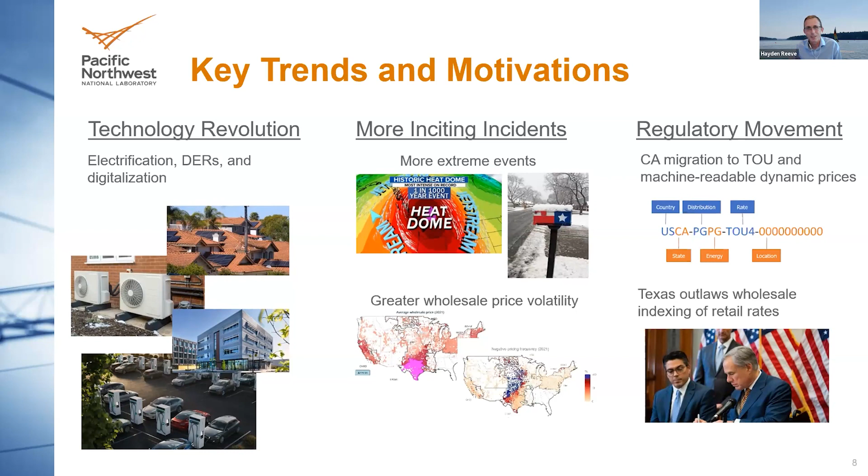So if we go to the next slide, PNNL has been doing a lot of work, both demonstrating in the field and with partners, the ability to provide these grid services from end users in the field. But we've also been doing a lot of work studying and analyzing future systems.

And so one big study that we completed last year was basically modeling the entire ERCOT system to show what large-scale demand-side participation means and how you might do that. And so we had a large integrated system model. We looked at different coordination frameworks. But the thing I want to really emphasize and showcase today is looking at the valuation methodology.

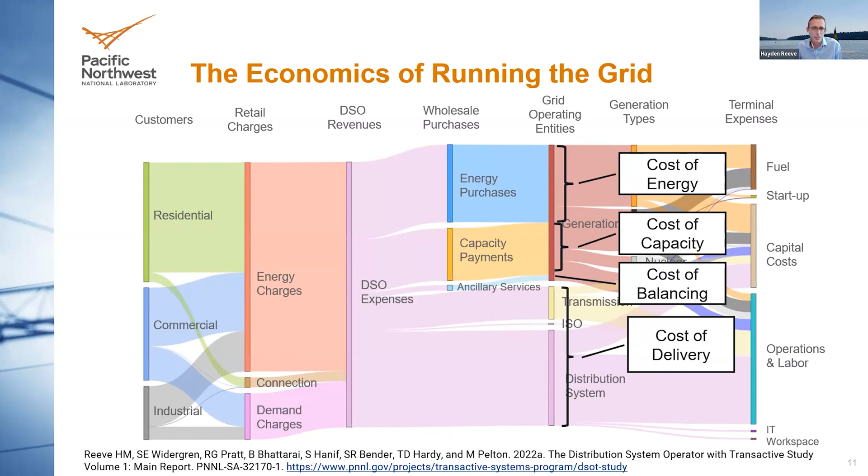So if you advance one more, I think this is useful to understand the proportionality of different functions of operating the grid and different grid services. So in terms of the grid services I was talking about, energy services is maybe about 30% of running the grid. Reserve or capacity, which you could combine with energy services, is more. The frequency response regulation ancillary services is only a small fraction, and a lot of the grid cost is just essentially what I call shipping and handling.

So if we go to the last slide, just some concluding remarks here. As we've found, and as many people know, there are just large fixed costs to operating the grid. And I think we'll see these grow, and we'll continue to see higher volatility in wholesale energy prices, and a desire to pass those on in terms of dynamic retail prices or time of use prices.

The second thing is there are now many, many proof points, both in studies and in real life, of the very large value proposition of grid edge participation. But the realization of that value proposition and the access to that varies considerably regionally. So some regions have become very motivated to enable this, others not so much.

And then finally, I think we'll see differences among these grid services in terms of which ones might be monetized and accessible to grid edge participants, things like energy capacity reserve services. But some just may not be big enough in size in terms of frequency regulation, and some might be too complex and too hard to incentivize for grid edge participants as we go forward.

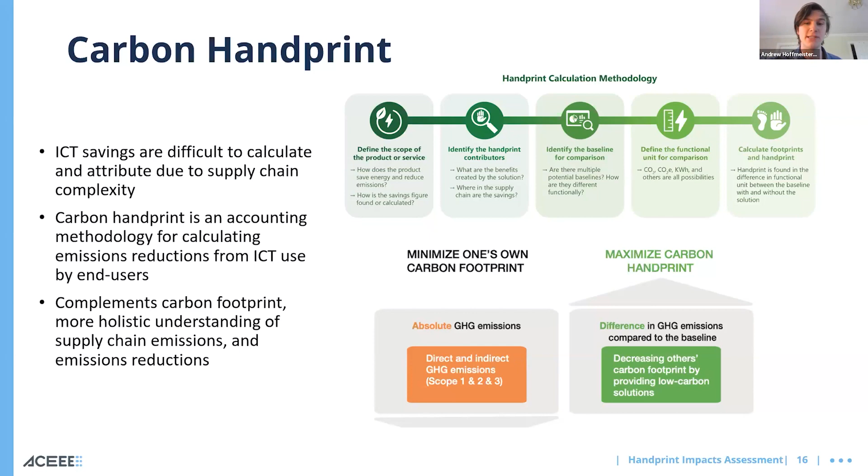So in these two graphics, there's a handprint calculation methodology, which we look to standardize in terms of the steps for finding a handprint: defining the scope, identifying the contributors, identifying a baseline for comparison, defining a functional unit, and finally calculating the footprint baseline, the footprint of a solution, and the handprint, which is the difference between them. So the goal in the effort of decarbonization is to minimize one's own carbon footprint while maximizing a beneficial carbon handprint. Next slide, please, Archie.

So ACEEE has been working for several years now with key technology partners like Cisco, Dell, and Intel to build out a proof of concept of what exactly handprint is and to evaluate the potential in calculating downstream emissions reduction impacts of ICT. Specifically, we've looked at these three case studies that I have here: the optimization of utility substations through a grid management solution, the optimization of depot charging of electric vehicles used for short-haul freight, drayage, and fleets,

and smart thermostats. So obviously, I can't spend too much time on the details here, but I'll cover very broadly the applications of each of our case studies and what the handprint analysis uniquely captures in this context. So we built out replicable calculators for finding the handprints, and we included optimizable inputs for various specifications. Firstly, I have smart thermostats here, which save energy broadly by using machine learning and data storage to adjust temperature settings based on patterns and preferences.

And we compared the emissions of a home or homes using smart thermostats to the life cycle emissions of a home using traditional thermostats across multiple scenarios of adoption. And the handprint that we ended up analyzing was the difference in emissions between the solution and traditional thermostats, which is otherwise lost if only evaluating the carbon footprint of the smart thermostat. So what we found was in 6 million Texas homes, which we analyzed specifically, they saved between 0.52 and 1.35 million metric tons of carbon dioxide, projected out to 2028.

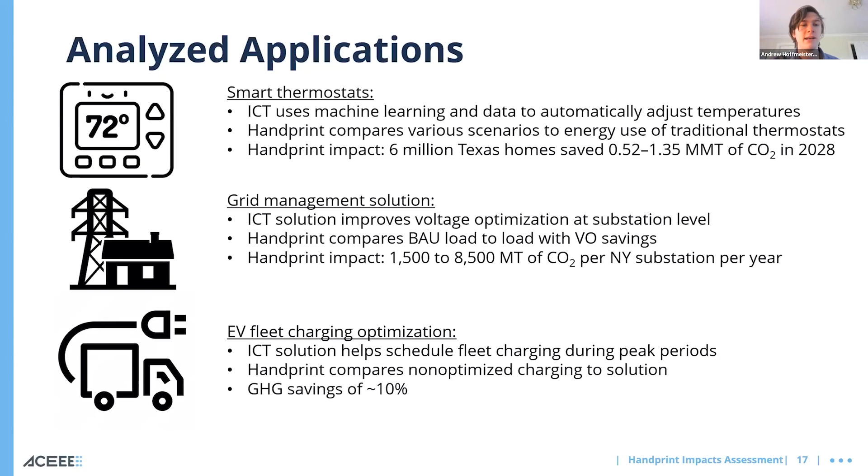Next slide, please, Archie. So now that we've demonstrated that handprint can be estimated in specific applications, we think that companies can now use similar approaches to begin to evaluate and report the full impacts of their products. The next step is to continue applying the handprint calculation methodology and tailoring it to other specific use cases. And what we determined is that there needs to be a standardized pathway towards attribution of emissions impacts in complex supply chains, especially in order to motivate companies to continue producing emission-saving technologies.

And handprint is just one of those methodologies that we wanted to demonstrate that we believe in. Handprint gets us on our way as a streamlined approach, uniform in its steps that I showed earlier, to revealing the impacts of a technology solution compared to its alternative, the business as usual.

Next slide, please. So thank you very much for listening. I think the applications of the handprint methodology will grow as technologies scale and complexity increases. I think this is a critical topic area to make sure that we can engage with scope 3 and supply chain emissions and emission saving in a holistic way.

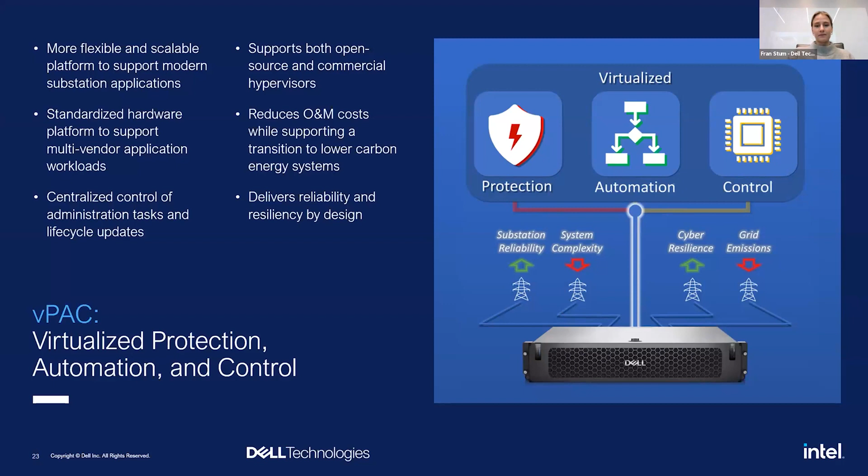So as Andrew introduced, we worked with ACEEE on completing one of these carbon handprint assessments specifically for our grid modernization solution. Most organizations are engaged in minimizing the negative environmental impacts, their carbon footprint, which we're most familiar with, of their activities through the efficient use of resources and lowered emissions. But to quote the U.S. National Climate Advisor, Ali Zaidi, we need the receipts when referring to how we measure and manage emissions data. So the way that we're doing this now, in this methodology that we discussed earlier, is the handprint assessment.

So working with our partners, Intel and VMware, Dell Technologies is taking the next step to reduce the carbon footprint of their customers by developing products and services that create positive effects, a handprint, if you will. So we're currently working towards measuring our exact carbon handprint in collaboration with ACEEE. And as our mutual end customers increasingly focus on sustainability, our ability to collaborate with other vendors and our partners to understand and optimize and attribute these carbon handprints and footprints to our solutions uniquely differentiates us from our competitors. Next slide.

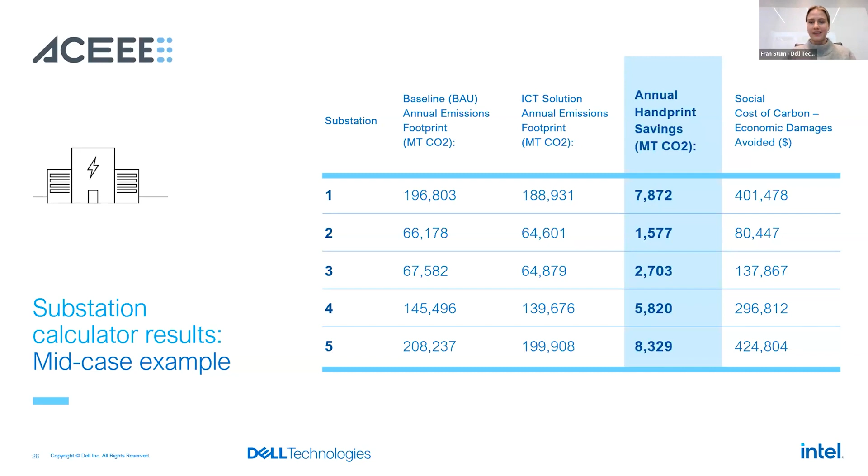When we're talking about the benefits of ICT enabled solutions like grid modernization. And with that, I'll be happy to answer any questions after the presentations, but thank you so much for having me.

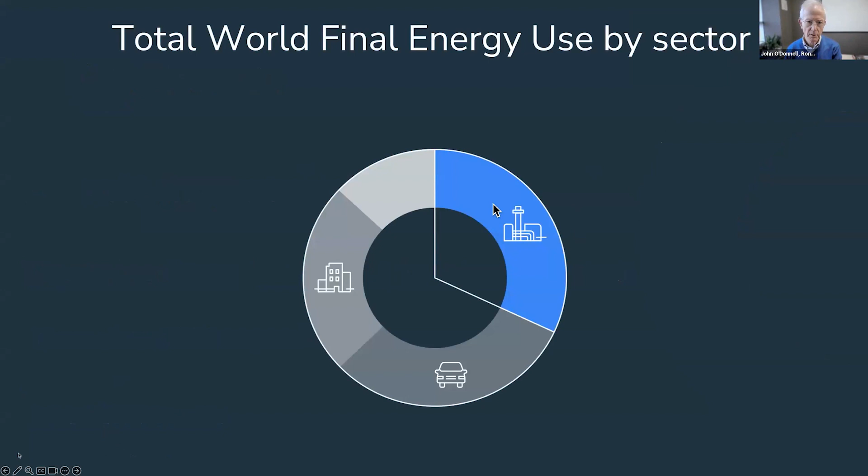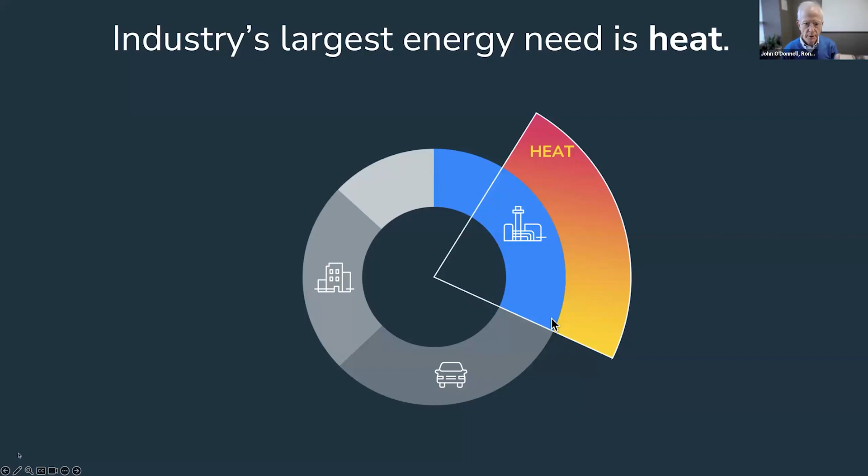I want to talk about something that people have thought is adjacent to the grid, but it is the next big challenge for the grid. Of total world final energy use, industry is the largest single portion, and 3/4 of the energy used by industry, 3/4 of all the coal, oil, and natural gas burned in the world, is for industrial heat. It's 6 gigatons plus, and hundreds of millions of tons in the United States.

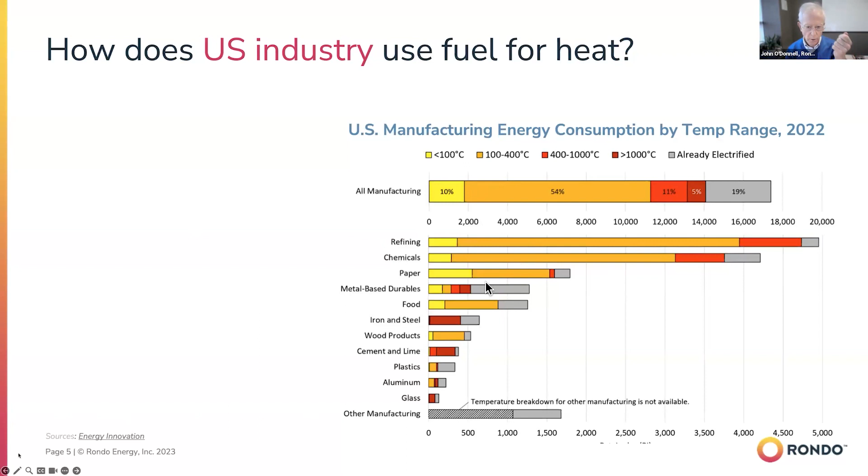In the United States, fuel is burned - this is an assessment by Energy Innovation looking at where industry burns fuel. People think of industry as cement and steel. Well, it is, but it's also food and paper and chemicals and fuels. And is this hard to decarbonize?

The challenge is that we are producing all kinds of low-cost commodities where energy is a really important part of the cost of production. It's going to go as slow as possible if a new solution is more expensive than fuel. There are other technical requirements - energy has to be continuous and has to be high temperature.

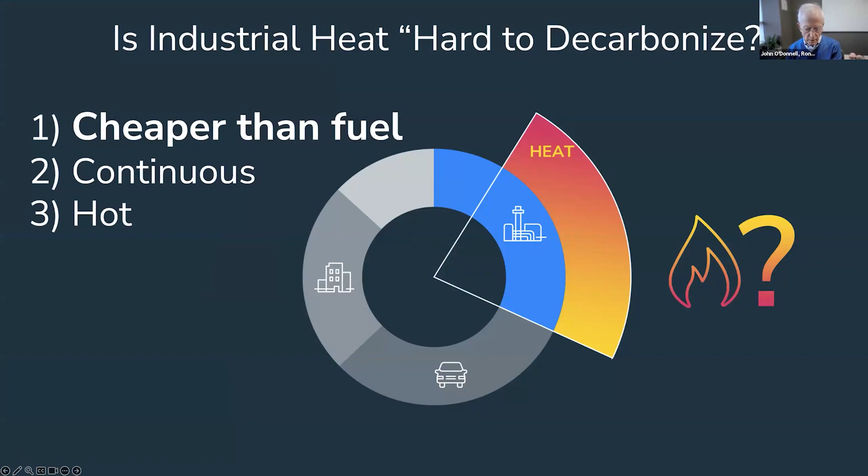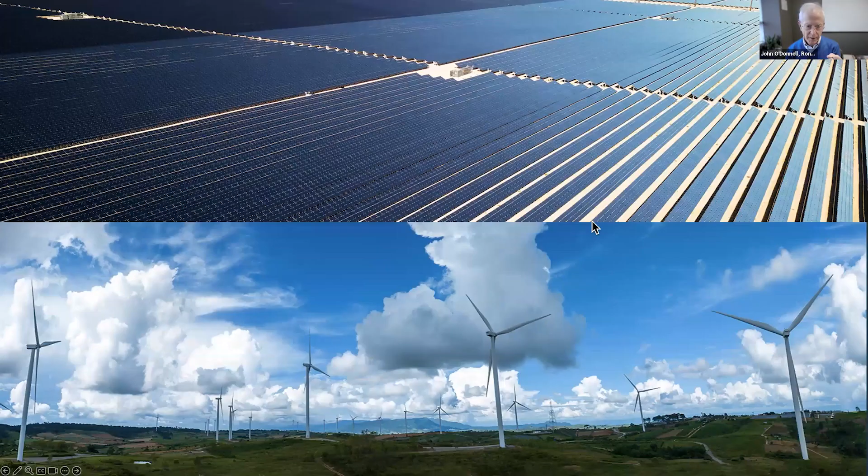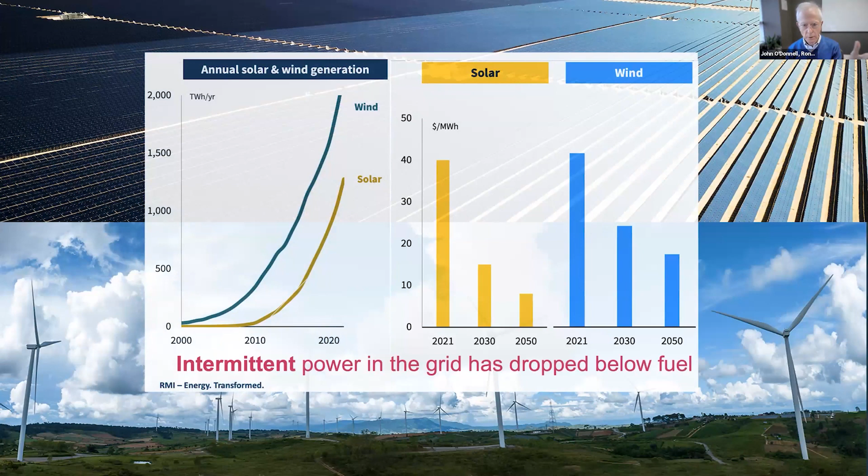As you know, the theory has been that the grid is going to have to hugely expand to deliver the 99.99% reliability that these boilers and furnaces deliver today, that industrial electrification is going to be a new continuous load on the grid. That's not really well matched with the asset we have though, right? The new assets are intermittent, and we are intermittently now having electricity all kinds of places in the US grid driven by the drive in renewables that is lower cost than fuel.

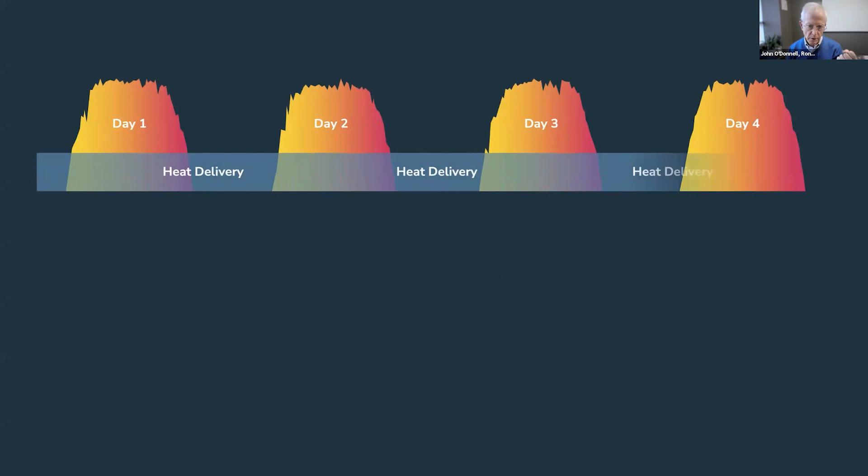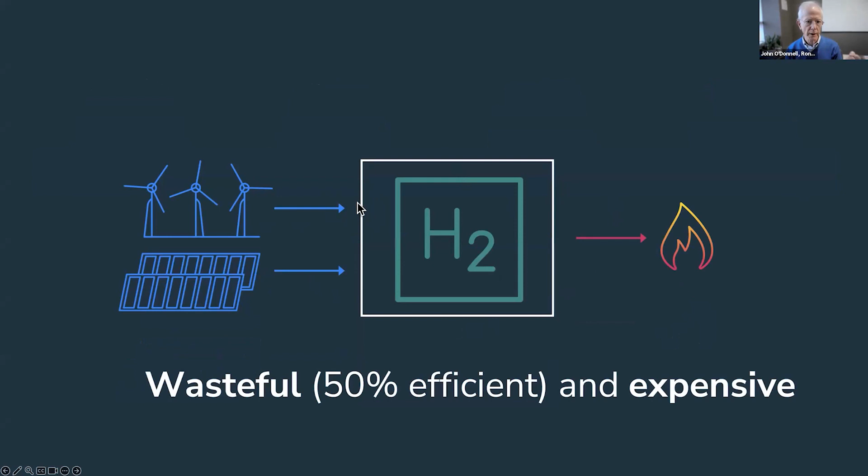So if there were a means of storing that energy to deliver industrial heat continuously, harvesting intermittent power, we could be making big strides. Of course, one of the things people have said for a long time is we're going to use hydrogen electrolyzers that we operate some of the time to have heat all of the time. Their costs and especially their efficiency means that without large taxpayer subsidies, they're a long way away. And none of the models show these operating at less than 70% capacity factor.

Electrochemical batteries also are in all kinds of development, and they're still at least a decade away from reaching price points that they could replace fuel, a fraction of the cost of electricity. But there are now dozens of companies working on not doing electrochemistry, but just heating something, a liquid or a solid, as a means of storing energy to decarbonize, so that you could get continuous heat from intermittent power from the grid, or for that matter, from local generation.

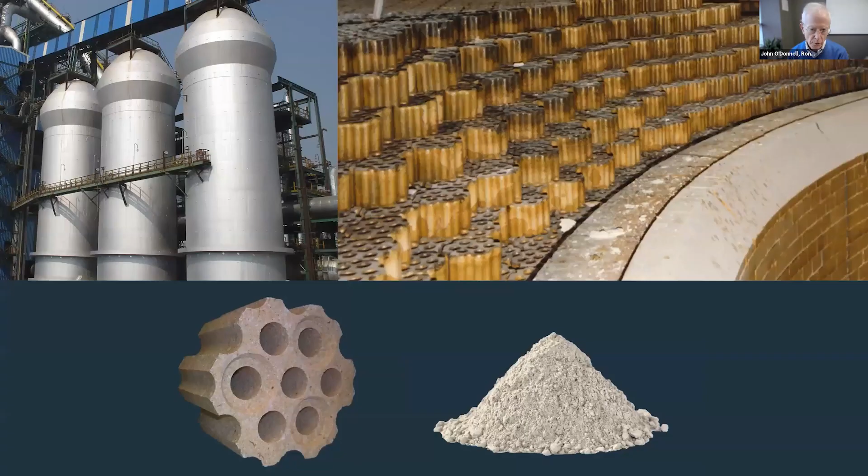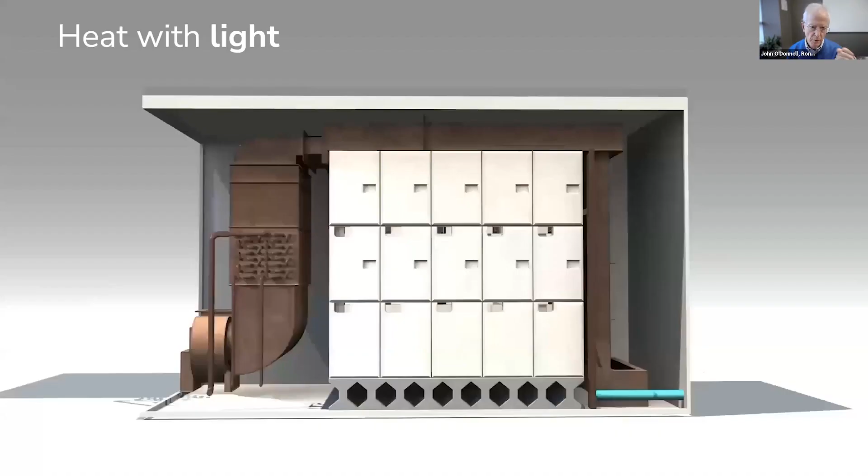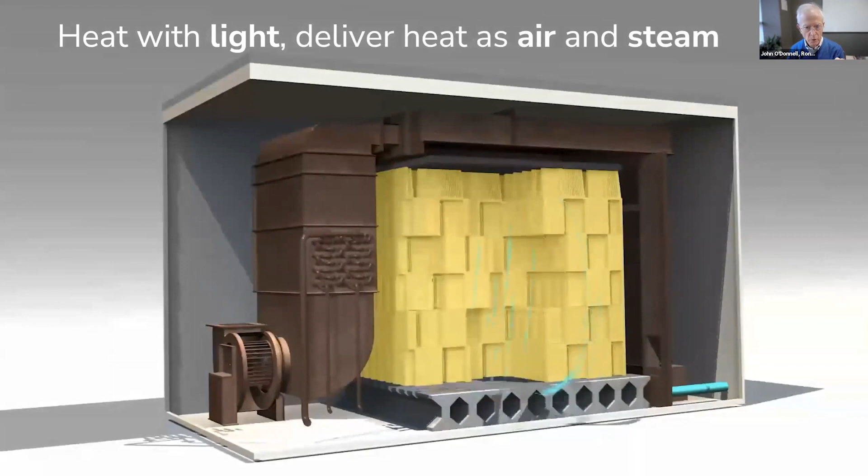Rondo happens to be harvesting - we stand on shoulders that started 200 years ago in the steel industry. There's a particular brick material that is used for heat storage at or above 1500 C, and there's well over 500,000 tons of this material in use today. We found a way to build electrically heated energy storage devices that store energy as heat in that very same brick, and then deliver heat continuously to an industrial process using a completely conventional heat recovery boiler, or delivering heat directly into a kiln or a furnace.

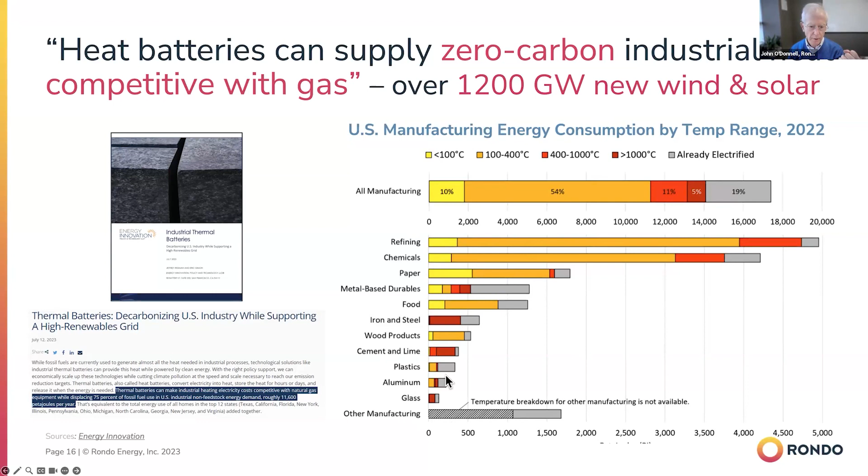These heat batteries serve 95% of the temperature range of all US manufacturing. If you do a units conversion for how much energy this is - if we're going to build new generation, wind or solar, it's more than 1,200 gigawatts of generation that will ultimately be needed to repower US industry. And that is now a fundamentally new kind of load on the grid.

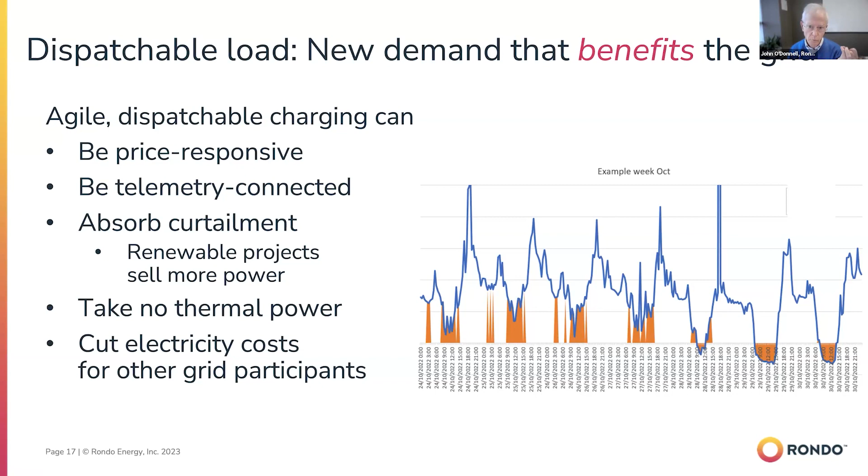These are things that are not taking power continuously, but are price responsive, telemetry connected, and can be dispatched just the way that generation can be dispatched, and can provide resilience and reliability services to the grid - converting intermittent power to continuous heat in the form of steam or hot air.

As it happens, all of the Rondo Tech electric thermal storage technologies are at or above about 90% efficient. From electricity to heat, we happen to be 98% efficient, the highest efficiency of any kind of energy storage.

These systems also have the prospect of playing a unique role in delivering distributed generation at factory locations, using the same cogeneration technologies that PURPA supported back in the 1980s. But instead of being powered by fossil heat, they're powered by intermittently captured electricity, and on a combined basis deliver continuous electricity and heat at over 95% combined efficiency. We're just at the beginning.

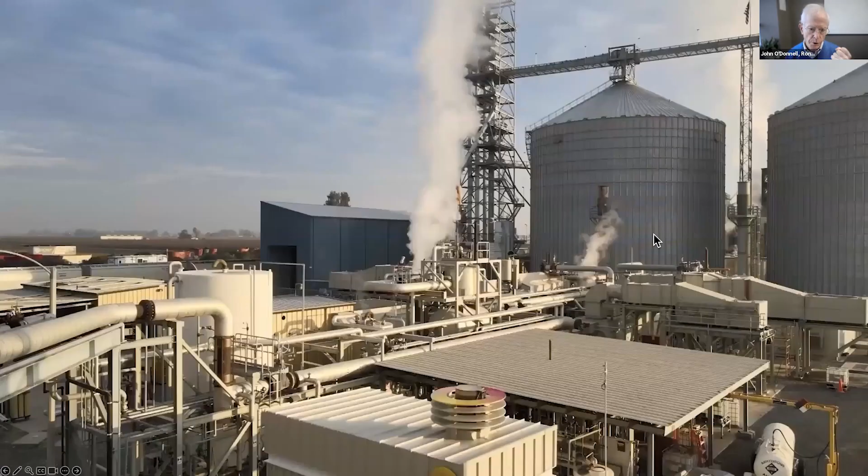Rondo is now operating at a corn ethanol refinery in Pixley, California. The refinery is not little, I misspoke. We're operating a small 2 megawatt hour unit today that happens to be the world's highest temperature, highest efficiency energy storage of any kind. We commissioned this in March, and it is the proof point for commercial rollout.

This unit is capturing electricity during the periods where it would otherwise be curtailed or at very low price. This is a day a couple of years ago in California. There's the wholesale power price, which not surprisingly collapses. This was all of the generation in SP15, and this is what the grid actually took. And this is not a battery.

There are lots of folks working on the problem of harvesting power at noon and delivering it at 7 p.m. We're harvesting power with something that's actually much cheaper and lower cost per kilowatt to charge, and we're using it to turn off the gas combustion.

Among pathways to turn off gas combustion, analysis by lots of folks is beginning to make it clear that this is lower cost and lower carbon emissions than any of the other proposed decarbonization pathways. So, that's hundreds of millions of tons of direct emissions.

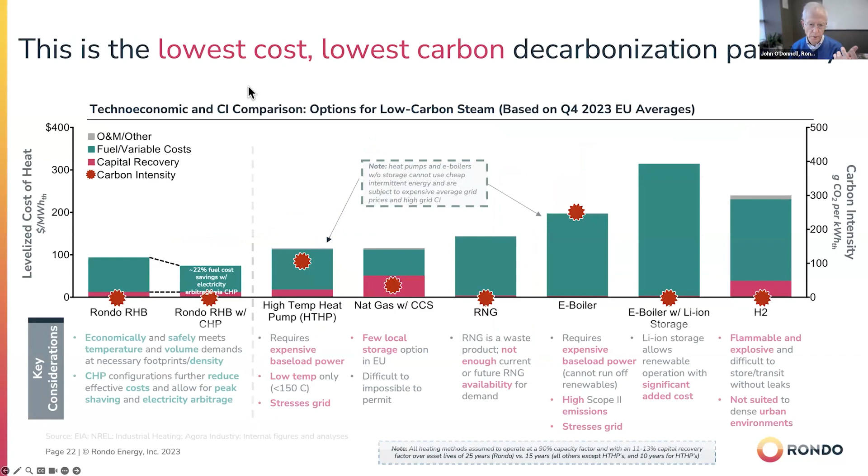New research by Jesse Jenkins's group, and others working in this area, shows there's an additional handprint from the presence of what he calls demand sinks that are only buying the very least cost energy and are tied into the grid. They wind up lifting the floor prices and reducing start-stops and inefficient operation of fossil generators. In some cases, for every 1 megawatt of this kind of load, 1.9 megawatts of renewables got built because of what it did to the economics, and they never increased average electricity prices in any of the areas modeled.

This is sort of new work, we're still seeing modeling going on in other places. This looked at the US Northeast and Southeast. But we're pretty excited about the prospect as these units are rolling out.

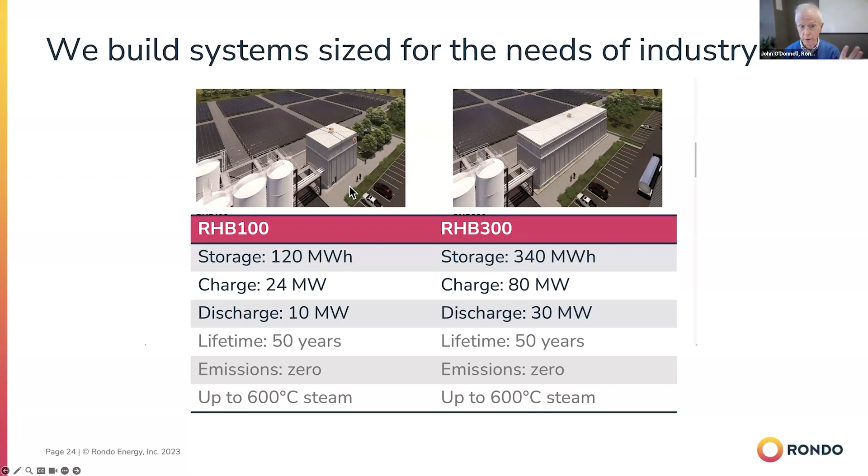We actually build 3 different models sized for the needs of industry. The things we're delivering right now are roughly 100 and 300 megawatt hour. I was just at COP last week talking about the first of our half dozen European projects. We are in construction in California, and this technology is now going to volume manufacturing. We have 2 gigawatt hours a year right now of production capacity with an Asian production partner, rising to 90 over the next few years.

As it happens, our webinar this morning is quite well timed, in that Treasury released guidance for the battery manufacturing production tax credit a few hours ago, earlier this morning, that says it incorporates thermal batteries.

So that's, I think, a brief overview. I think we see enormous opportunity to move very rapidly. There are plenty of challenges as well, with things like grid access tariffs and the ability to participate in markets, and interconnection rules that are very different in different places in the US and different places in the world.

We're focused on deploying right now in the places where it works, and very keen for an education process to take place to drive, to open access kind of everywhere. Thank you.

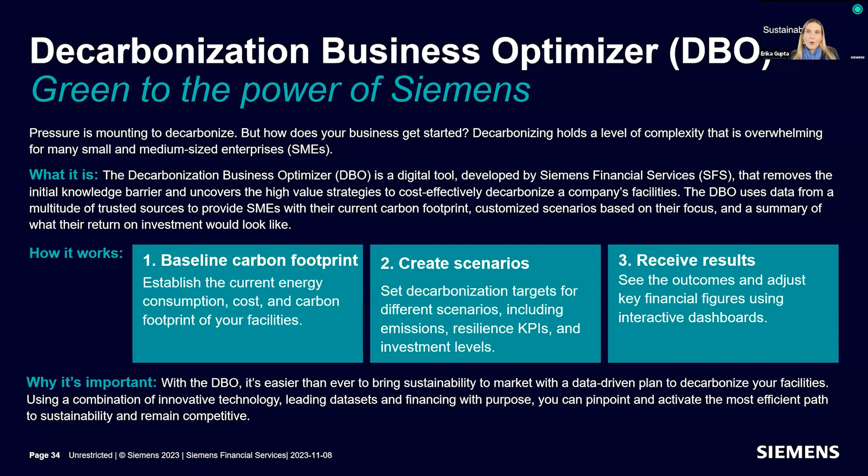We're using all publicly available and trusted data sources. For all the technology costs, we're using the annual technology baseline from NREL, so it's not Siemens specific, it's vendor agnostic. It includes options like thermal energy storage, hot and cold, in addition to battery energy storage. We're looking at wind, solar, electrification, really trying to say, what is the pathway that could get you there and how can we help?

We really found that the initial knowledge barrier, as well as financing availability for some of these more complex projects or innovative technologies we want to bring in, tend to be the two largest roadblocks we want to push past in order to really make a difference in this transition.

So with that, I will return back to our host to kick off Q&A.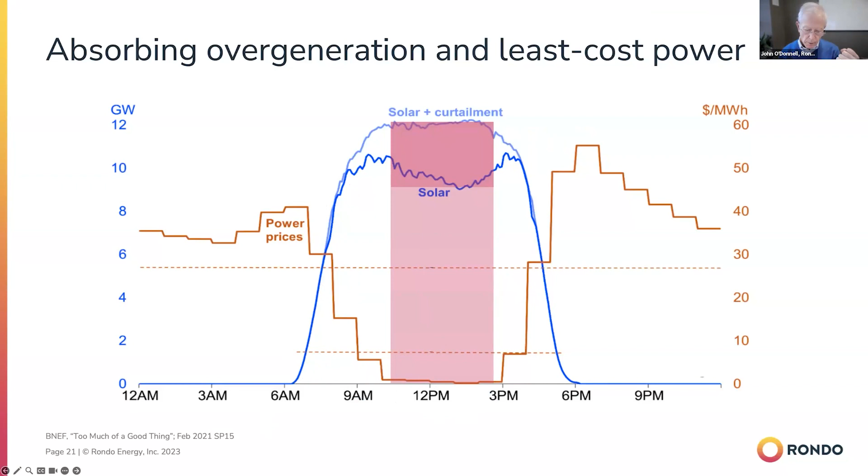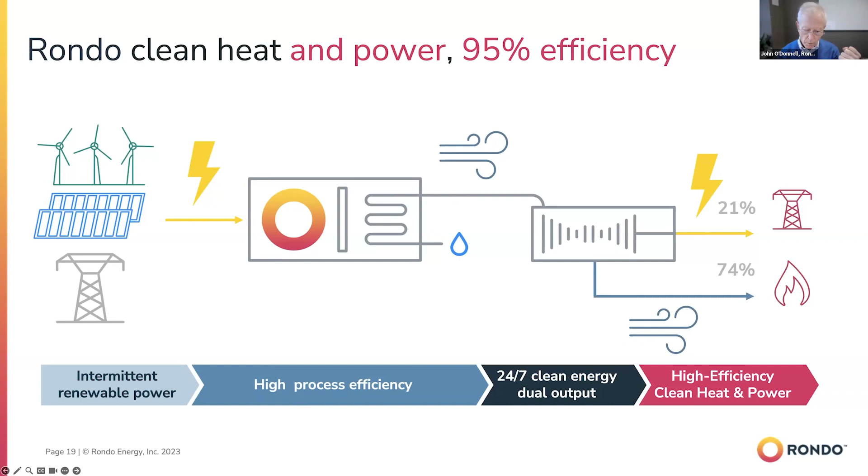However, with FERC orders for batteries and battery participation, there are lots of questions about whether that counts as a battery, with or without. Here in California, there's a real drive for decarbonization, but California charges a volumetric transmission cost that is independent of cost causation, whether you're taking power on or off peak. That transmission access charge is more than the cost of fuel, so that even if electricity were free, there's no way these things can come into the grid.

The things that we're working on in Europe, again, the rules are different in Denmark and Ireland, and then Scandinavia, Norway, and Germany for that matter. So it's a longer thing that we have to talk about right now, but enabling large loads that are fundamentally never going to take a single megawatt hour from a thermal power plant.